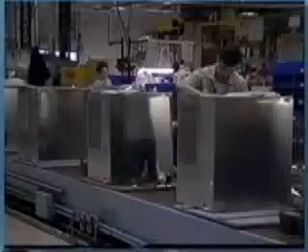Hoshizaki, a leading manufacturer of commercial food service equipment for over 50 years, now offers ice machines designed to be the most dependable and serviceable on the market. Utilizing the latest state-of-the-art technology, Hoshizaki run tests every machine at the factory with 23 quality performance tests.

This video will demonstrate the basic sequence of operation of the Hoshizaki KM Cuber, including a simple checkout procedure, preventative maintenance, and cleaning instructions. Before we begin the basic operation, let's look at some of the features and benefits that make Hoshizaki machines so dependable and serviceable.

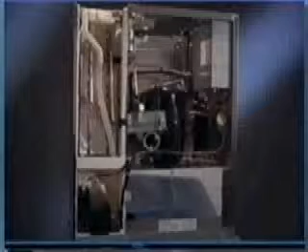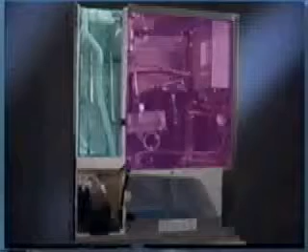Regular maintenance checks and servicing are made easier with the KM Cuber's removable panels. The component sections are divided into separate compartments, free from the damaging effects of moisture. Separating the evaporator or wet section from the dry electrical components helps eliminate many problem areas. Dividing these compartments also helps insulate the heat generated by the compressor from the cold section, making the KM Cuber more energy efficient.

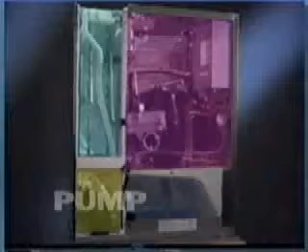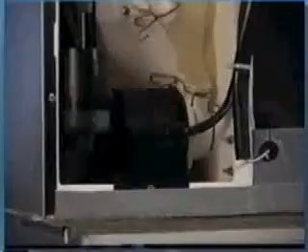Unlike other ice makers on the market, the KM Cuber's pump motor is housed in a separate insulated compartment, away from the moisture of the evaporator, reducing corrosion, bearing and winding failures. At the heart of our pump assembly is a more efficient permanent split capacitor motor. This assembly can be easily removed and rebuilt in the field.

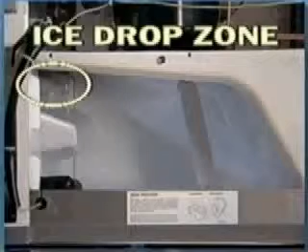The sealed evaporator section has a smaller ice drop zone than other ice makers. During operation, positive air pressure helps to reduce the airflow around the evaporator, keeping airborne bacteria out and reducing algae growth. Many manufacturers build evaporator plates in welded sections of copper, which are plated with nickel or tin.

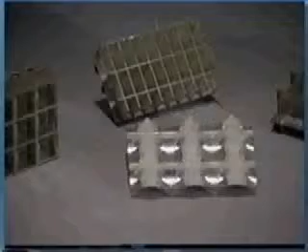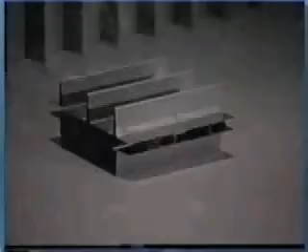Plating the copper is necessary for sanitation and to allow the ice to harvest properly, but it may flake and peel from the copper with age, contaminating the ice. The unique plate design of Hoshizaki's evaporator, with its stainless steel freezing surface and oval-shaped serpentine tubing, produces a crystal-clear crescent-shaped hard cube of ice, which displaces more liquid than square or diced cubes.

Since pure water freezes first on the evaporator plate, minerals are left to run off into the reservoir, reducing scale buildup and saving frequent and expensive cleaning.

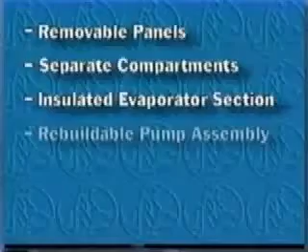Removable panels, separate compartments, insulated evaporator section, efficient rebuildable pump assembly, small ice drop zone, and unique stainless steel evaporator - just some of the features and benefits of the KM Cuber that help make your job easier.

Now, let's look at the basic sequence of operation of the Hoshizaki KM Cuber.

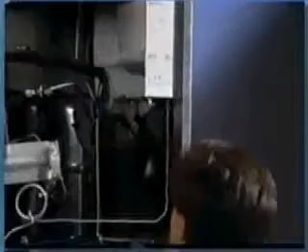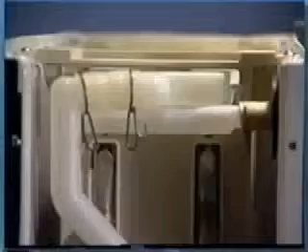When the power switch is turned to the ice position, the inlet water valve opens, allowing water to enter and fill the reservoir. The 1-minute fill cycle assures that the ice machine will not start until there is sufficient water, eliminating overheated pumps and compressor problems.

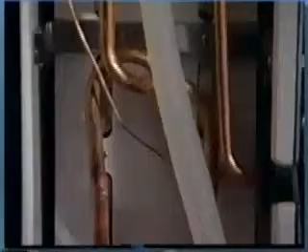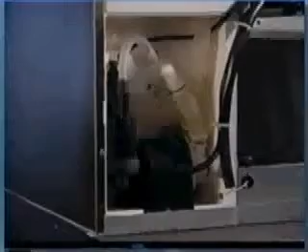After 1 minute, the controller board checks to see if the float switch is closed, and if not, repeats the fill cycle until the water level is sufficient. The float switch check also occurs at the end of each harvest cycle to ensure continuous automatic low water safety.

When the switch is closed, the controller starts the initial harvest cycle, which runs approximately 2 to 3 minutes depending on ambient air and water temperature.

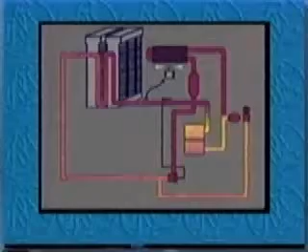First, hot gas from the compressor enters the serpentine coils of the evaporator while the inlet water valve remains open to assist in the harvest.

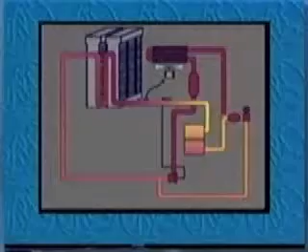This causes any ice remaining from the previous cycle to be released from the plate while water continues to fill the reservoir. Starting the compressor in the harvest cycle with the hot gas valve open provides a no-load start, better efficiency, and longer life of the compressor and components.

When the thermistor senses that the evaporator temperature has reached 48 degrees, the solid-state defrost completion timer on the circuit board takes control of the remainder of the harvest cycle.

During the harvest cycle, the inlet water valve brings water through the supply tube and down the center of the evaporator plates. This water flow also helps transfer heat from the serpentine coils to the stainless steel plates and pre-chills the water flowing into the reservoir.

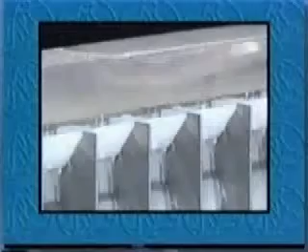During the freeze cycle, water is pumped to the outside of the plates through the distributor tubes. In the freeze cycle, the hot gas and water valves are closed. As the self-contained condenser fan and pump motor starts, water is circulated up and across the outside of the evaporator plate and back down into the reservoir.

The circuit board controls the freeze cycle for the first 5 minutes, providing short cycle protection. The float switch then assumes control to initiate the next harvest. If power to the machine is interrupted, the unit will always restart in the 1-minute fill cycle.

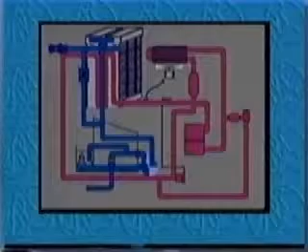Before the second harvest, a 10-second pump-out cycle occurs. As the hot gas valve opens, allowing gas to warm up the evaporator, the pump motor stops for 2 seconds, then begins again in reverse. This pumps out the water containing concentrated minerals from the bottom of the reservoir, through the check valve and out the drain. At the same time, water is used to power flush the float switch.

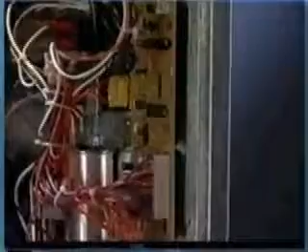For improved cleaning, the pump-out timer on the circuit board may be adjusted to lengthen the cycle to 20 seconds. It can also be adjusted to occur every 1, 2, 5, or 10 cycles. These adjustments provide the service technician with flexibility to overcome problems associated with the high mineral content present in some local water supplies.

When the pump-out cycle is completed, the pump motor stops and the inlet water valve opens. Just as in the initial harvest, the evaporator is warmed by the hot gas defrost and water assist, clearing any ice left frozen on the plate.

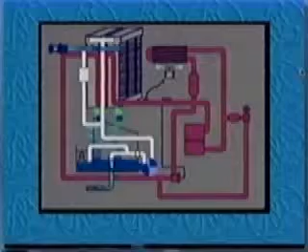As the reservoir then refills in preparation for the next freeze cycle, the water level in the reservoir always overflows the standpipe at the end of the harvest cycle. On top of the standpipe is a displacement cap, which pulls additional minerals from the bottom of the reservoir and flushes them. This cleaning action can be extended by lengthening the defrost completion timer setting.

When the bin is filled with ice, the machine automatically shuts off until more ice is needed. Let's review the basic sequence of operation.

The ice maker always starts with the 1-minute fill cycle. The initial harvest cycle clears ice from the plate, assures a full reservoir, and allows quick and easy compressor starting. After 5 minutes in the freeze cycle, the float switch assumes control to initiate the next harvest.

The 10 to 20-second pump-out cleans the reservoir every 1, 2, 5, or 10 cycles. The normal harvest is the same as the initial harvest and allows the flush to clean the reservoir at the end of this cycle.

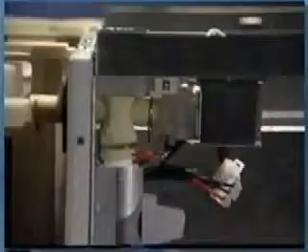To perform the 10-minute checkout procedure for the KM Cuber, restart the unit and verify the operational sequence. Make sure that all components cycle on correctly, from the 1-minute fill, through the initial harvest, and into the freeze cycle. If a component fails to cycle properly, check that component and its controls for problems.

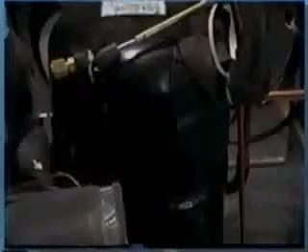If all components are operating correctly, allow the unit to operate in the ice-making mode for about 6 minutes and then disconnect the float switch at the circuit board. This initiates the harvest cycle. Check for correct pump-out operation by watching water flow through the clear tubing or out the unit drain.

The following preventative maintenance checks will help keep Hoshizaki KM Series Cubers dependable and serviceable for many years. Clean the removable air filter. Service the water filter and check the water valve screen.

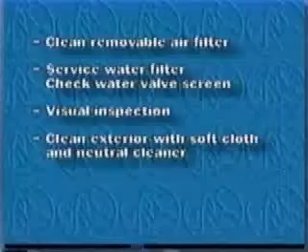Visually inspect for loose wires, oil spots, water drips, etc. Clean the exterior with a soft cloth and neutral cleaner. Clean and sanitize the water system and bin.

Annual cleaning and sanitizing of the water system is recommended. More frequent cleaning may be required depending on local water conditions. Cleaning the water system is an easy procedure with the KM Cuber. The complete cleaning instructions are listed on the reverse side of the front panel.

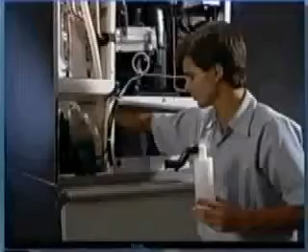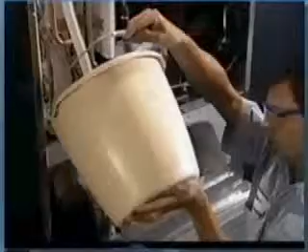First, drain the reservoir by removing the standpipe on M models or drain plug on S series models. Mix the cleaning solution according to directions on the label and then pour it into the reservoir. Hoshizaki recommends Hoshizaki Scale Away or Economics Labs Lime Away. However, the durable stainless steel evaporator plate will not be harmed by any commercial ice machine cleaner.

Set the control switch to wash and turn the evaporator cleaning valve to the open or wash position. With these controls set, the pump circulates cleaner inside and outside of the evaporator plates. Since the inside pass does not collect heavy mineral deposits, allow the cleaner to circulate through the cleaning valve for about 5 minutes.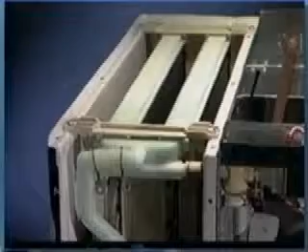Then turn the cleaning valve back to the horizontal position. This allows all the cleaner to flow on the outside of the plates where more cleaning is needed. Once the flat surface is clean, pull the distributor tubes out 3/8 of an inch to allow cleaner to flow down the evaporator ribs. When cleaning is completed, flush the water system thoroughly with clean, fresh water.

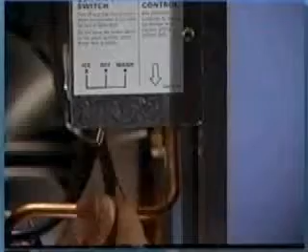Turn the control switch to the ice position. The ice maker will restart in the normal sequence of operation. This same procedure should be used to sanitize the water system.

Mix a commercial ice machine sanitizer as per directions on the panel, or a 5.25% sodium hypochlorite solution. Circulate this solution for 5 to 10 minutes over the evaporator surface and ribs. Flush the solution from the machine with clean, fresh water before restarting the ice maker.

We hope this video has helped you better understand the basic sequence of operation and checkout procedure for Hoshizaki KM Cubers. Call our toll-free hotline for further information on KM Cubers or other Hoshizaki products.